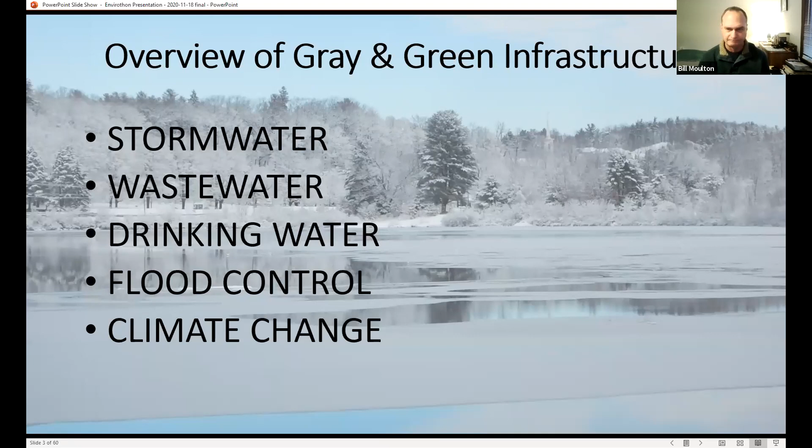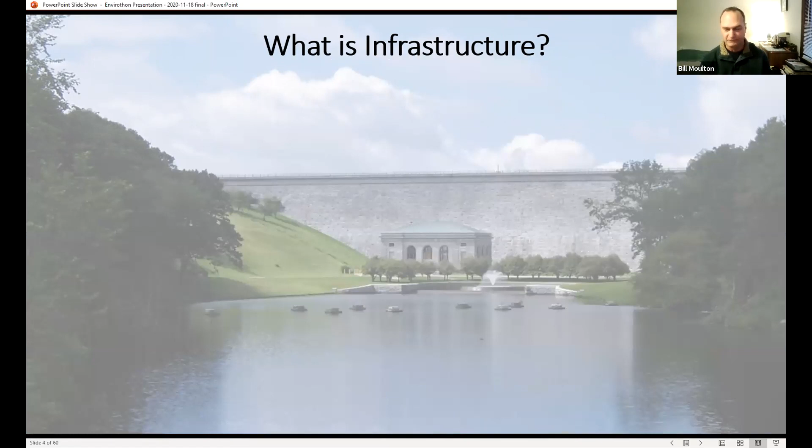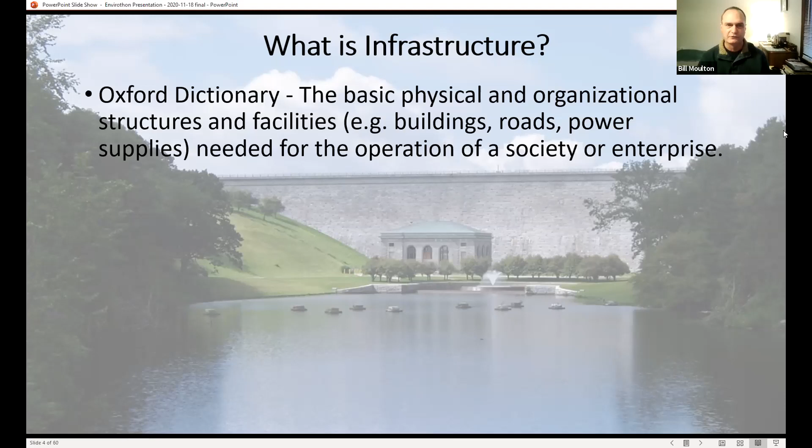So what is infrastructure? You see the slide right there, that's Wachusett Dam. That's infrastructure, but we'll give you some definitions. Oxford Dictionary defines infrastructure as the basic physical and organizational structures and facilities, such as buildings, roads, power supplies needed for the operation of a society or enterprise.

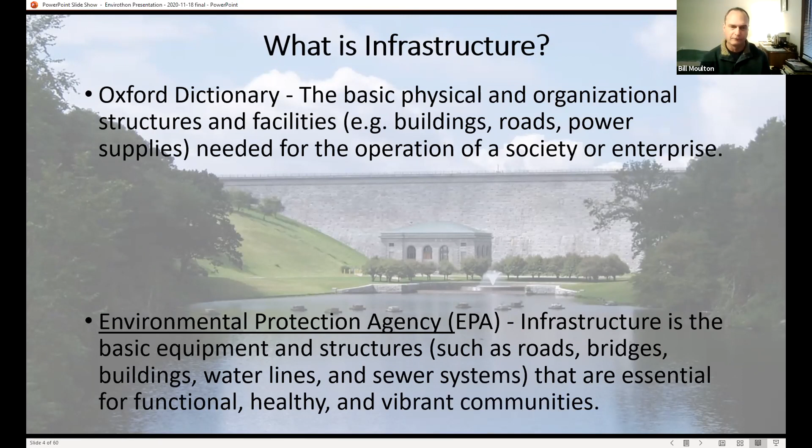The Environmental Protection Agency defines infrastructure as the basic equipment and structures such as roads, bridges, buildings, water lines, and sewer systems that are essential for functional, healthy, and vibrant communities.

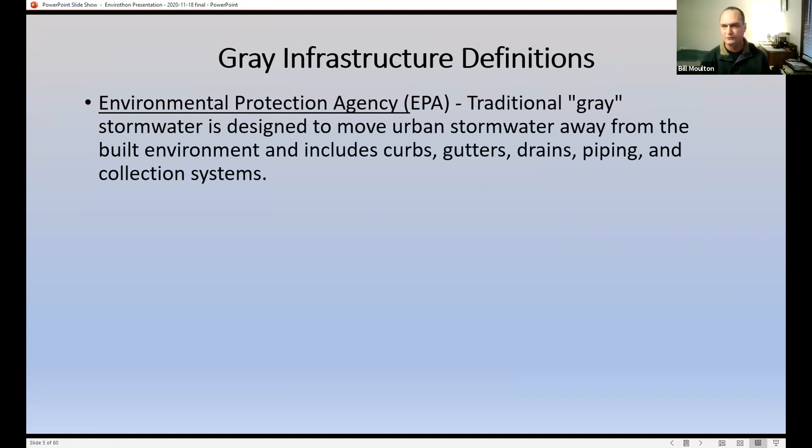So onto the gray infrastructure definition. The Environmental Protection Agency defines it as traditional gray stormwater. It's designed to move urban stormwater away from the built environment, and this includes curbs, gutters, drains, piping, and collection systems.

The National Green Infrastructure Certification Program defines gray infrastructure as constructed structures such as treatment facilities, sewer systems, stormwater systems, or storage basins. The term gray refers to the fact that such structures are often made of concrete.

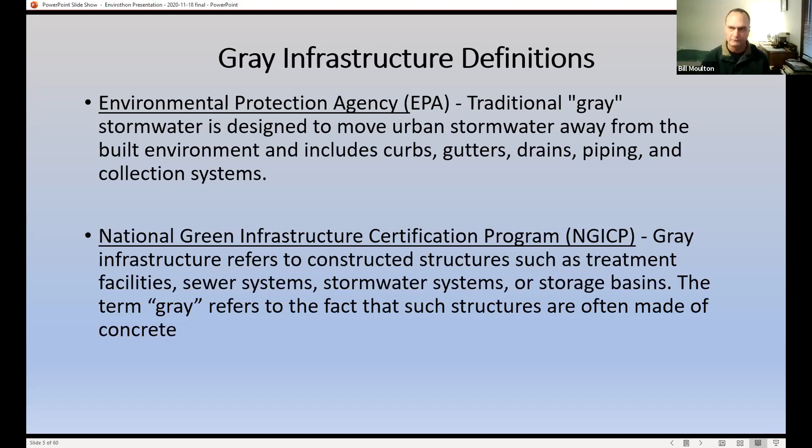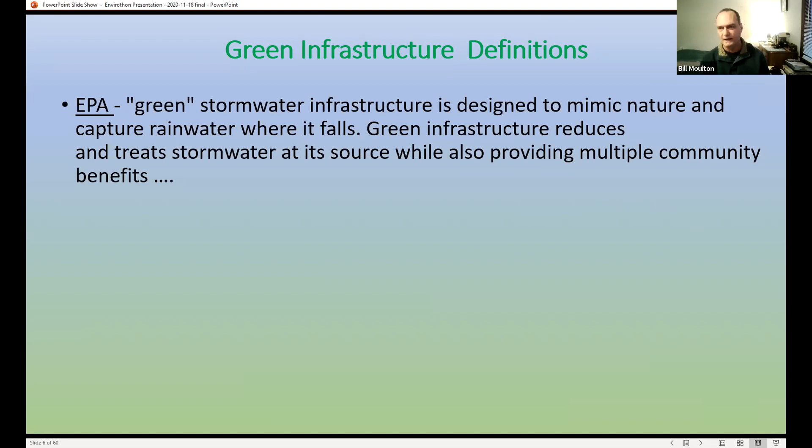Green infrastructure definition: the EPA says green stormwater infrastructure is designed to mimic nature and capture rainwater where it falls. Green infrastructure reduces and treats stormwater at its source while also providing multiple community benefits.

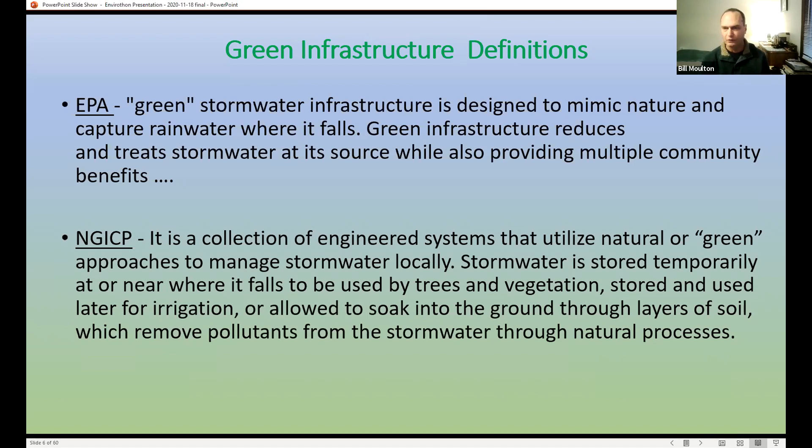The National Green Infrastructure Certification Program defined it as the collection of engineered systems that utilize natural or green approaches to manage stormwater locally. Stormwater is stored temporarily at or near where it falls to be used by trees and vegetation, stored and used later for irrigation, or allowed to soak into the ground through layers of soil, which remove pollutants from the stormwater through natural processes.

I actually found this in our state laws. This is Mass General Law, Part 1, Title 2, Chapter 21, Section 26A, which defined green infrastructure as practices involving the management of water, stormwater, wastewater to achieve water quality mandates set forth in the Federal Clean Water Act.

Practices designed using natural or engineered techniques to capture, remove, or prevent nutrient, nitrogen, and phosphorus loading to any part of a water system, including groundwater deposits, discharges to surface waters from septic systems, wastewater treatment facilities, and stormwater runoff.

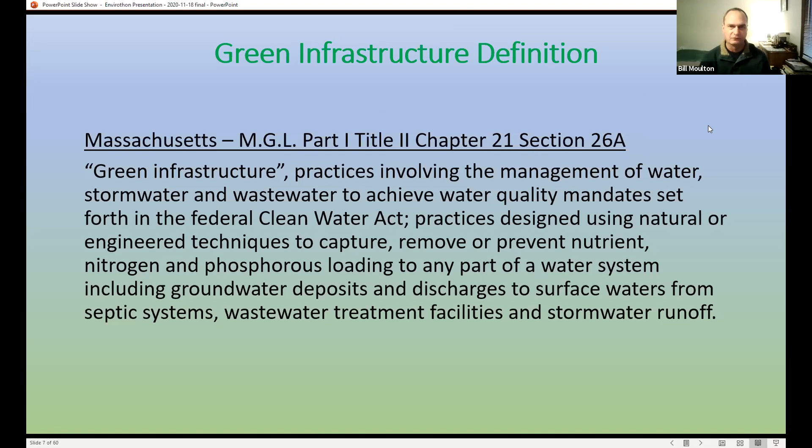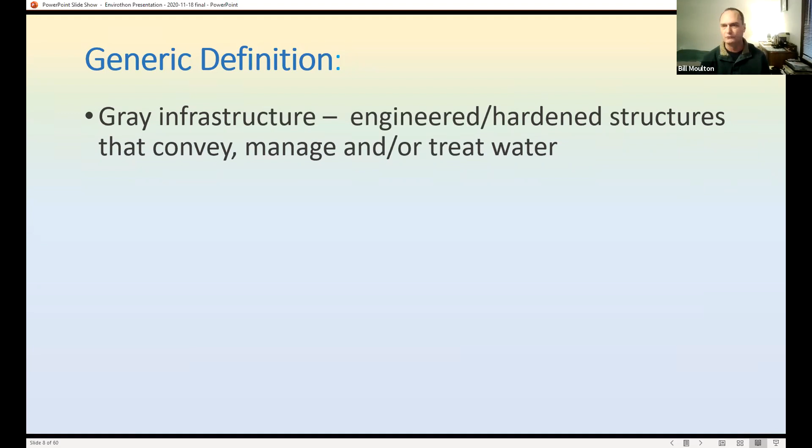So that's our definitions for gray and green. But since a lot of that had to focus on stormwater, I thought I'd develop a more generic definition for our purpose. So gray infrastructure, simply put, is engineered, hardened structures that convey, manage, or treat water. Green infrastructure is more natural and less hardened engineered structures or systems that conserve and keep water locally to be managed and treated.

Now, caveat is these definitions or terms can be relative to the subject, purpose, location, environment, and or scope.

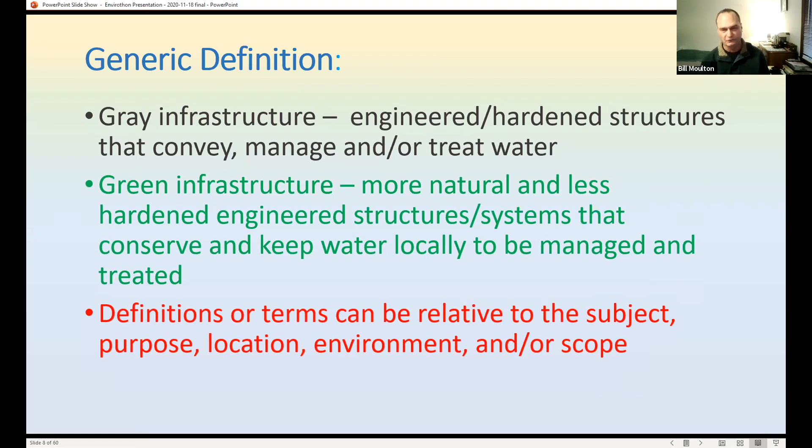So which infrastructure do you think would be the best? Gray, that's probably your traditional infrastructure system. Green, that's your more natural system. We have both, which would be a combination of the two systems.

Now I've put in none, and what I mean by that is utilizing the natural ecosystem to manage the water. And then last would be all, so that would be use the system that best fits the situation. And that goes back to the definition or the caveat I had in the previous slide about the difference relative to the subject, the purpose, location, environment, or scope.

So I think you can't fit everything into one can. You've got to be able to tailor your infrastructure or your system to the needs and the situation, the environment.

So what is stormwater? Rainwater comes down, it goes on roofs, it goes on lawns, driveways, walkways, streets, highways, parking lots, and they all, when that stormwater runs, it has to go somewhere. And so as it travels across all these different surfaces, it picks up pollutants.

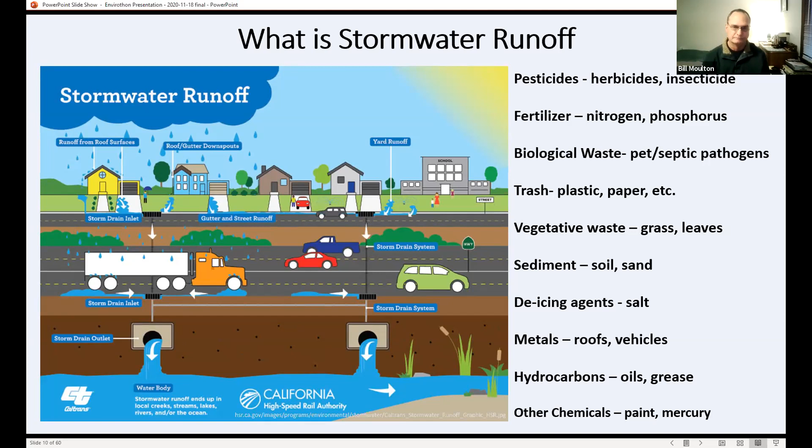So we'll start with stormwater gray infrastructure. Here's just a listing of some gray infrastructure: roads and parking lots. I won't go over them, but they convey water. They are designed to shed water in a particular direction, and that usually goes to a catch basin, and then from the catch basin it goes into pipes. You also have drainage swales and channels that will take water.

You have oil grit separators, proprietary separators, sediment forebays, and detention basins.

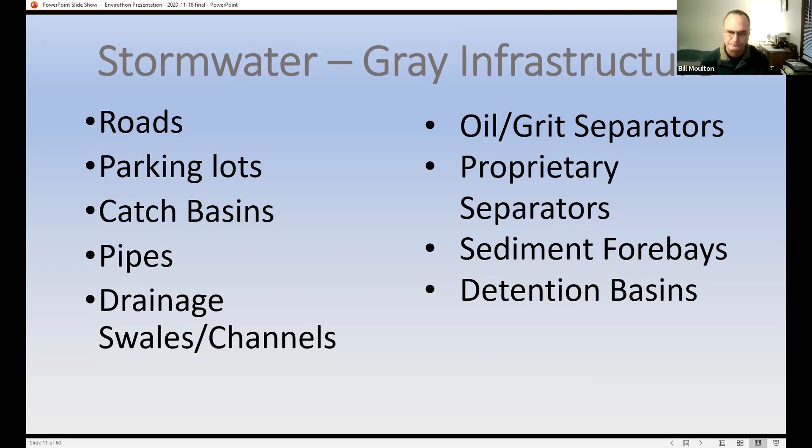The detention basin is not designed to really treat water. You might get a little bit because of the sediment it catches, but it's more designed to attenuate or slow down stormwater flow. So it will reduce peak discharges and reduce our erosion potential. Another, go back to the detention of the catch basin.

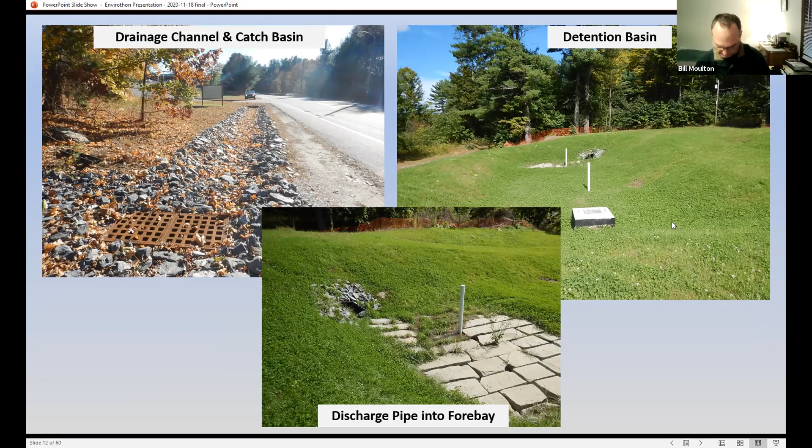This is an oil grit separator. It's designed to capture sediment such as sand and soil, and it's done through baffles. It's also designed to capture any oil that, when you have a storm, will be picked up from the roadway and brought into it. This captures the oil so it's held there and can be pumped out.

And on the right, we have a proprietary separator. That system is designed to remove sediment and oil from the stormwater, but it does it through hydrodynamic forces. It uses velocities to be able to trap the sediment.

This structure is actually a Stormceptor. That's one of the structures we have for our stormwater system. Another one you'll find is what they call a downstream defender.

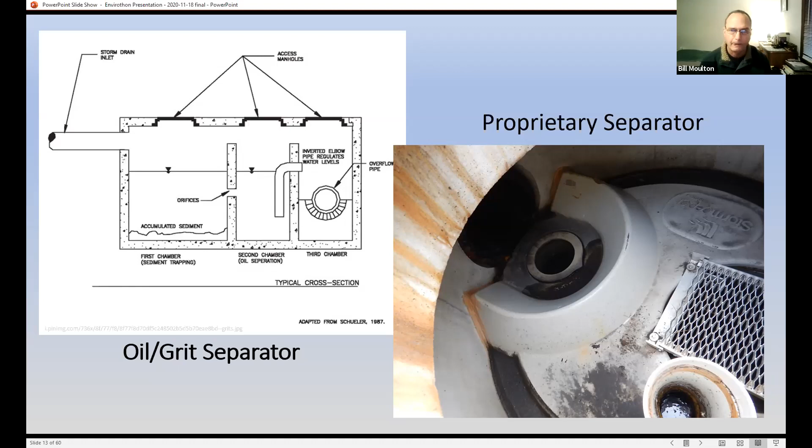So next we'll go over green infrastructure. Starting with a water quality swale, rain gardens, bioretention area, a wet basin like a constructed wetland basin, infiltration basins, porous pavement, permeable pavers, rain barrels, and cisterns.

I want to make a comment about low impact development. You'll see that a lot, especially related to green infrastructure. Green infrastructure utilizes, and low impact development utilizes, green infrastructure. So LID, low impact development, is a system and practices that use or mimic the natural process. That's a definition from the EPA. It's a process where you try to eliminate your stormwater runoff, and that can be done in a variety of ways.

One way would be reducing the widths of your roadways. Many roadways, like out by my house, are probably about 26 feet wide. You could probably reduce that to 22 feet and still have safe travel of traffic. It's just too wide, and actually the wider it is, sometimes people tend to drive a little faster. So that would be another benefit of narrowing.

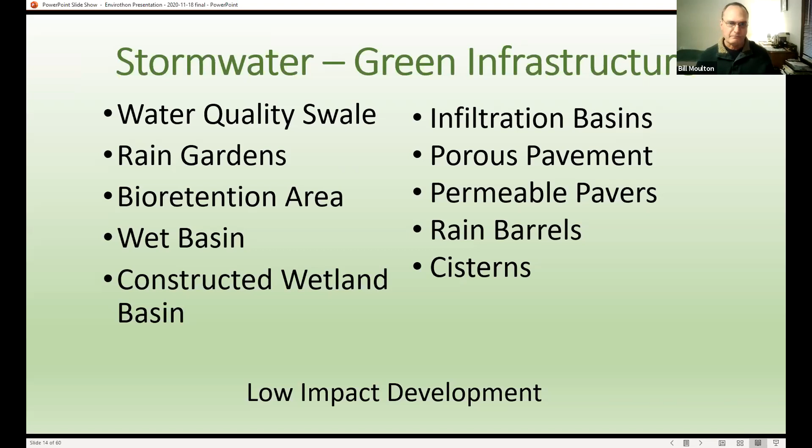So this is a bioretention area, one of our stormwater systems. What happens is it's designed so stormwater will flow into a forebay, and then it will come into the bioretention area. This is designed to capture sediment. It's also designed to treat your runoff, and it infiltrates, so you're recharging the groundwater.

It's designed to capture a particular storm event. Typically this one is designed to capture a 100-year storm event. You may also see that referred to as a 1% event.

And then on the right here we have a rain garden. This rain garden was just put in this year for a small parking area. Generally they're smaller and not designed to take large areas. They're generally designed to capture what they call the first flush from a storm. So if you get a rainstorm, the first amount of stormwater that runs off, it will capture it and treat it. It will infiltrate.

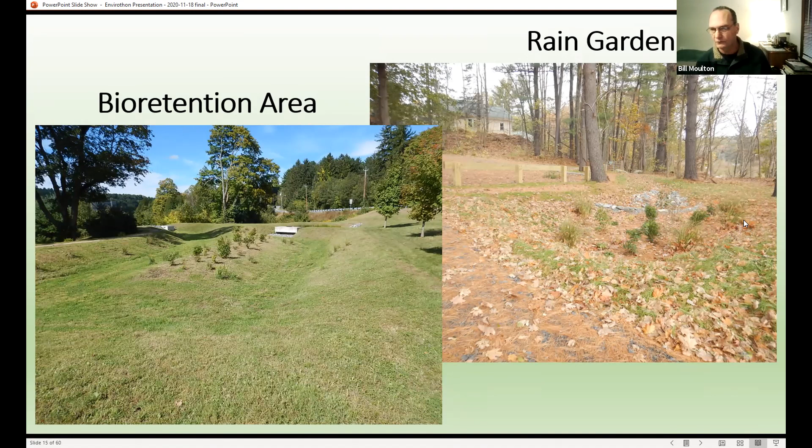This is a wet detention basin, or wet basin. You'll see it maintains water in it all the time. It's designed to capture storm events, particularly a 100-year storm event, or whatever it's designed for, to capture sediment and for pollutant removal. Now let's look at the water quality swale here.

These are usually vegetated, and sometimes they'll have check dams. A check dam is just a bunch of stone placed across the width of the swale to slow down stormwater velocity and prevent scouring, while also capturing sediment. So it's designed to capture sediment and provide some pollutant removal. Usually it's not designed to handle a large storm event, just a smaller one, like maybe a 2 or 10-year storm event.

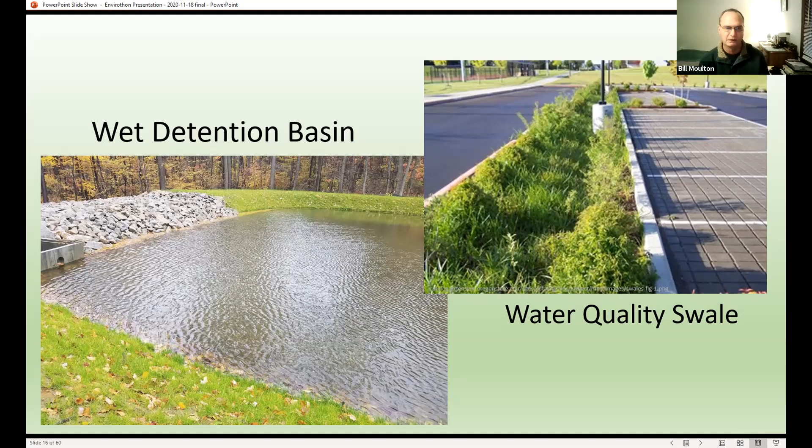This relates to the Wetlands Protection Act—when a system is designed, they look at it within a 2, 10, 25, and 100-year storm. A lot of systems are designed for a 100-year storm, but those tend to be a lot larger. So based on the situation, they may design for a 10-year event in order to capture some sediment and pollutant removal.

So here are the infiltration basins. You have two types: above ground and underground. On the left, stormwater runs off the roadway into a forebay, which captures sediment. You really need that sediment capture, because the water then flows over into the infiltration basin—you don't want too much sediment getting in there, or it will clog and won't infiltrate. This should dry out within 72 hours, which helps recharge your groundwater and provides pollutant removal.

On the right is an underground infiltration basin. Runoff from your parking lot flows into a catch basin and a structure that diverts the water into different bays for infiltration, with gravel usually underneath. It stores the stormwater, and these systems can be designed for large events such as a 100-year storm.

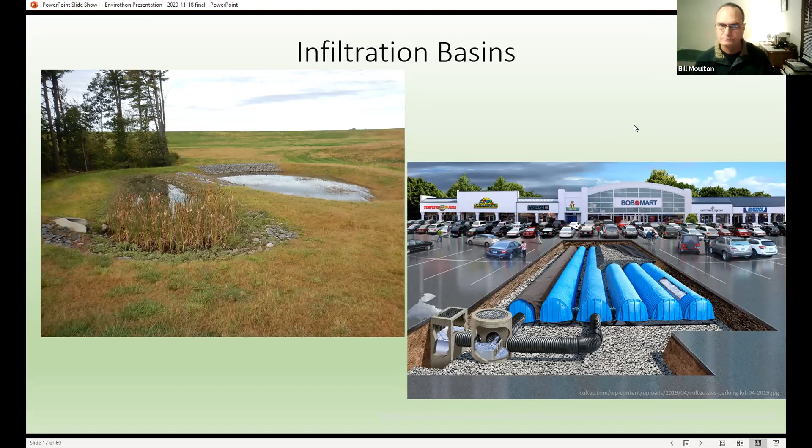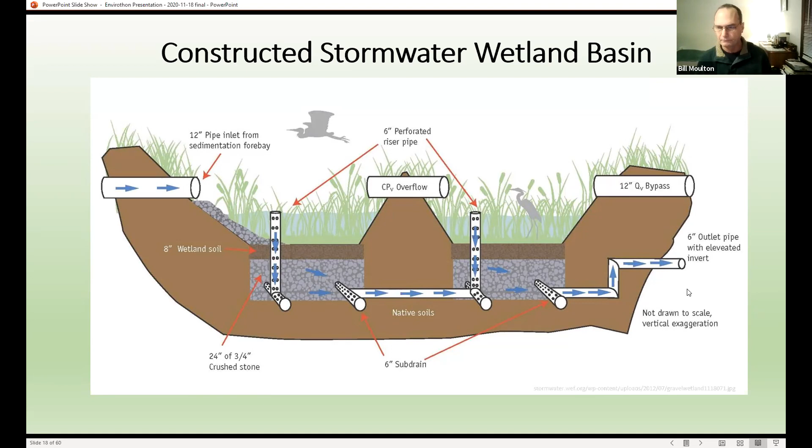The next one is a constructed stormwater wetland basin, also known as a gravel wetland. Water comes in, you have wetland plants that take up nutrients, pollutants, and sediment. It drains through crushed stone, travels through this cell into pipes, into the next cell for additional treatment, and eventually discharges out. We actually have one as part of our stormwater system, taking direct discharge from the roadways into the Wachusett Reservoir.

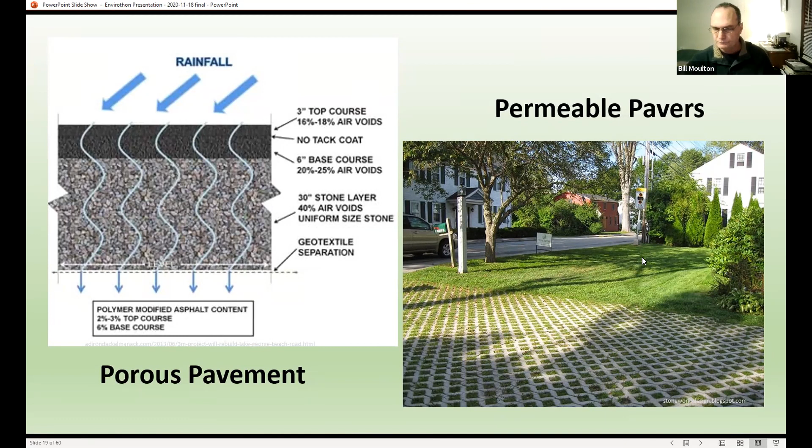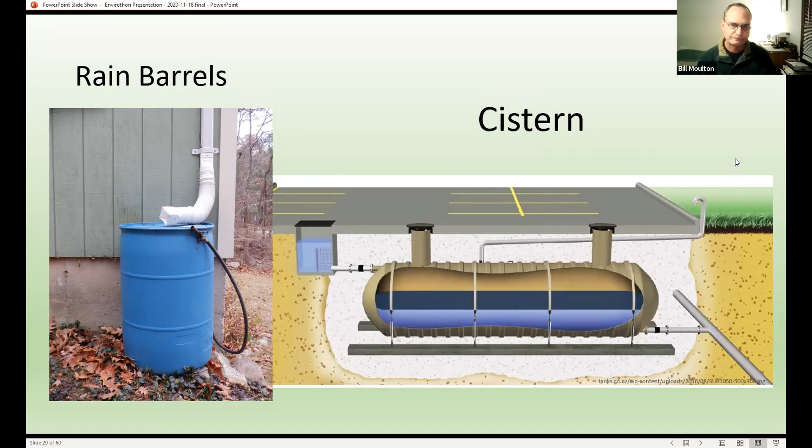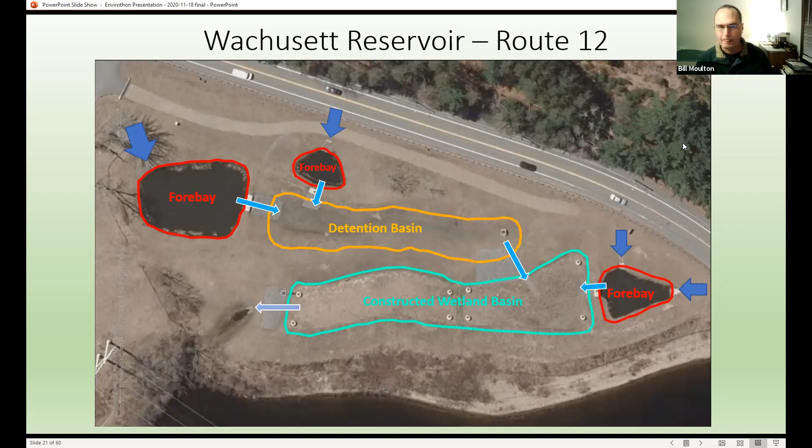So we start with a catch basin. Those catch basins right there—you want to make sure they're not clogged so the water does get into them, because you're trying to capture stormwater. It goes from here to the catch basin. It's a deep sump catch basin.

That will capture some sediment, and then it comes into this sediment forebay. It has an impervious bottom. Most sediment forebays don't have this—they will drain—but because of the desire to prevent issues if there was a spill along this roadway, this would help capture any kind of oil or fuel that was spilled, and wouldn't allow it to seep into the ground.

And then we have this oil control structure, designed to prevent any kind of fuel or oil that gets into a sediment forebay from going into the detention basin or the gravel wetland. This is the detention basin—it's long, designed for a 100-year storm, so it will handle a 100-year storm.

At the far end, you'll see another oil control structure. The water will come from this forebay here, down this way, and then go into your gravel wetland.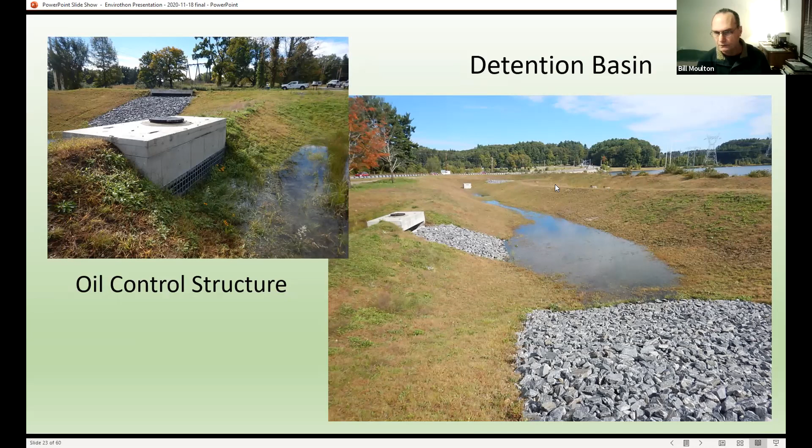So here's the gravel wetland. This is the discharge pipe from the detention basin. This rock area here is an emergency spillway—so if the water gets too high, it will spill over. The reason you use large stone is to prevent any kind of erosion or cutting of the bank. This would prevent that.

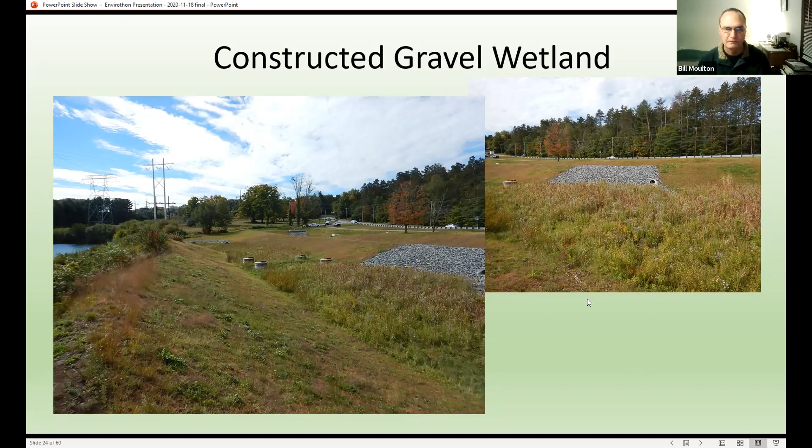The water then comes into this gravel wetland and eventually soaks down. The plants take up the nutrients. So here in the lower right, you have these wetland plants—you see a lot of cattails. I don't want any kind of hardwood trees growing in there; you want to keep it more herbaceous vegetation. And then you have your leaching chambers here.

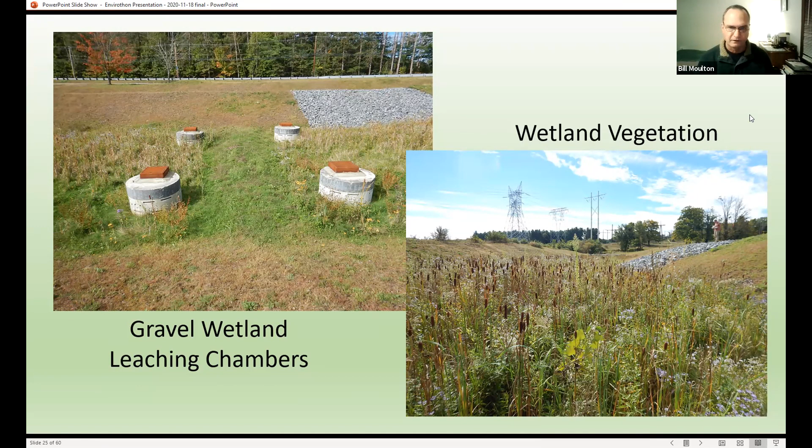If you went back to that diagram about the constructed wetland, this is very similar. The water comes from the right, goes into drainage pipes that collect and move it through this berm, releasing into the gravel and this cell, eventually making its way to the discharge pipe and then into the reservoir. That's a pretty big area used to capture stormwater to protect the reservoir.

So now there's another issue to take up for gray-green, which is wastewater. We have composting toilets and household septic systems - I'd classify that as more of a gray system. Alternate or enhanced septic systems would be more of a green system. Constructed wetland septic system - green. Community cluster septic system - classified as gray. Constructed wetland wastewater treatment plant - that would be considered green infrastructure. Then you have municipal and regional wastewater treatment systems, and last, reclaimed and reused wastewater.

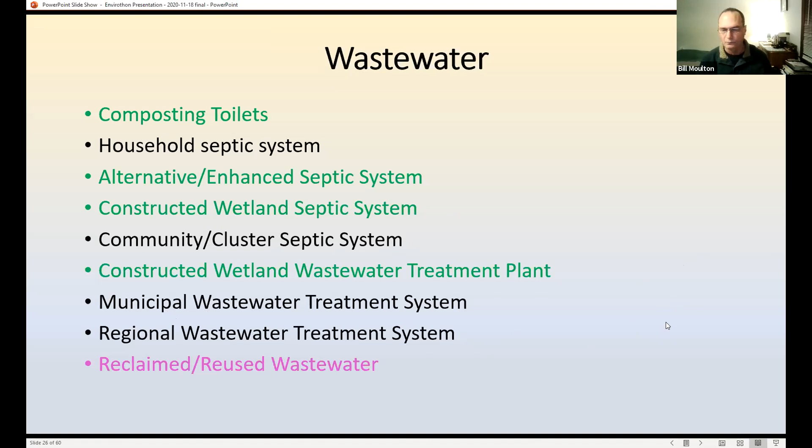So composting toilets - you'll see these if you go to Mass Audubon, they have some in some of their sanctuaries or facilities. Usually your waste goes in here, and you've got to put in organic matter such as leaves that'll decompose. You have a vent to take the smells away, and eventually you have to clean this out. But it works, and the good thing about it is it doesn't use any water.

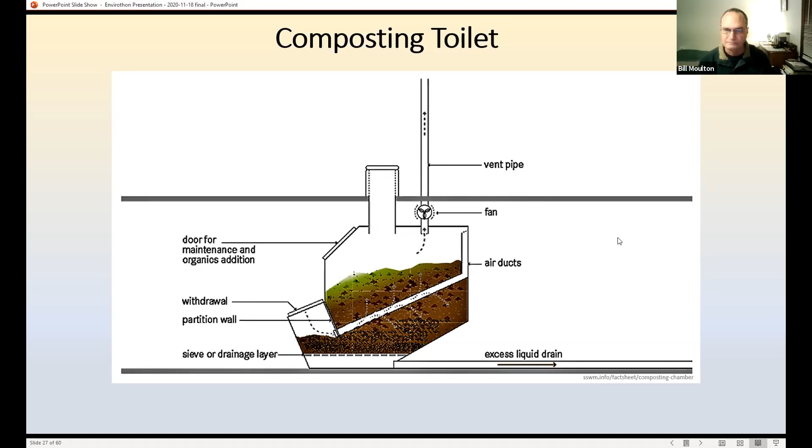This is your conventional septic system, the household septic system. Your waste comes from the house, goes into a septic tank, where solids settle out, and the fluid goes to a distribution box and then to what they call a drain field - what we up here usually call a leaching field. That's usually sand and gravel with perforated pipe that allows the liquid to soak into the ground, where bacteria will eat away at the pathogens and anything in that liquid, so the water is cleaned as it goes down into the soil.

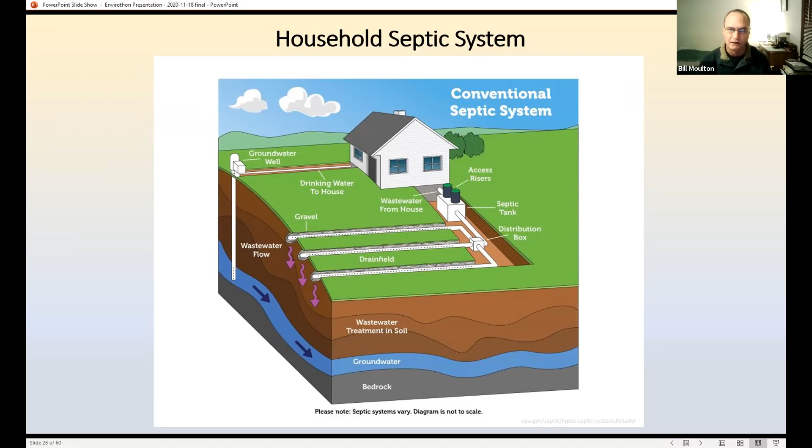It does recharge the groundwater. There are issues - if you see the groundwater well there, depending on regulations, the well has to be a certain distance away from your leaching field. Also, there's a certain amount of space required for a leaching field, so that can be a challenge with putting the septic system in. There are issues with septic systems failing too, since they have a limited life. There's also issues with soil - if you don't have adequate soils, that can be an issue with using a household septic system.

There's alternative or enhanced septic systems - this is just one type, there are different ones. They're designed to treat using this one here as an aerobic system, injecting oxygen down into the tank, which allows bacteria to more efficiently eat the sludge or solids and clean the effluent, so then it comes up and goes to your leaching field. So you have those microorganisms, which is what you want, and you'll see this used actually in much larger treatment plants as one of the treatment methods.

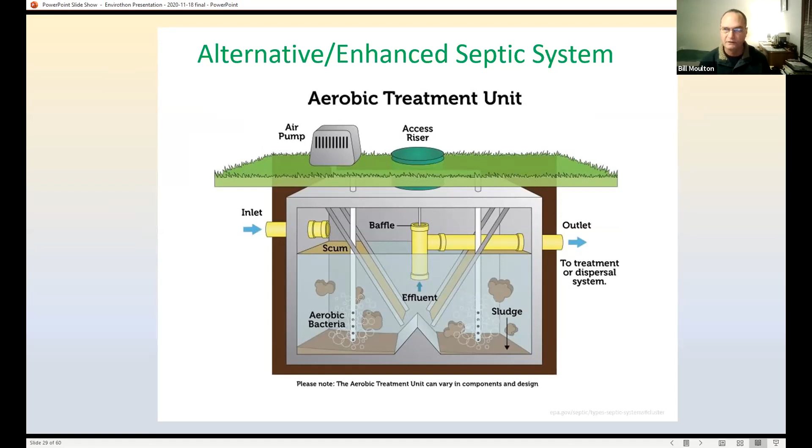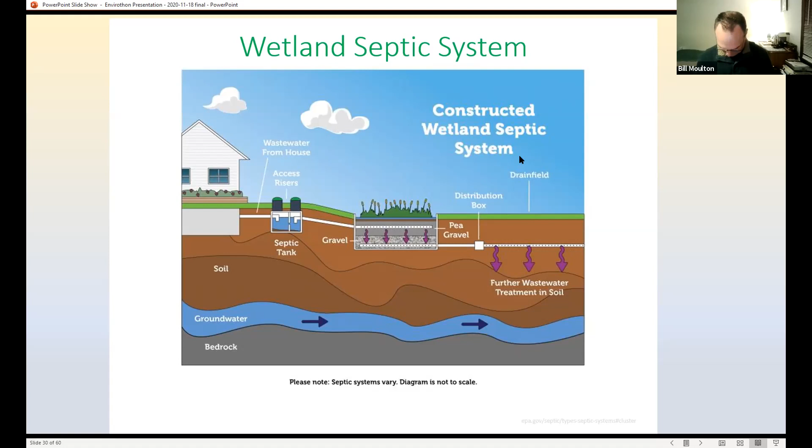This is a community or cluster septic system. This would be where people have their own septic tank, or you could even just have one septic treatment or collection tank, and then it would go to a leaching field. That's one way of using limited space, especially if you're using a cluster development where houses are on smaller lots - you could preserve more open space by using a cluster type septic system.

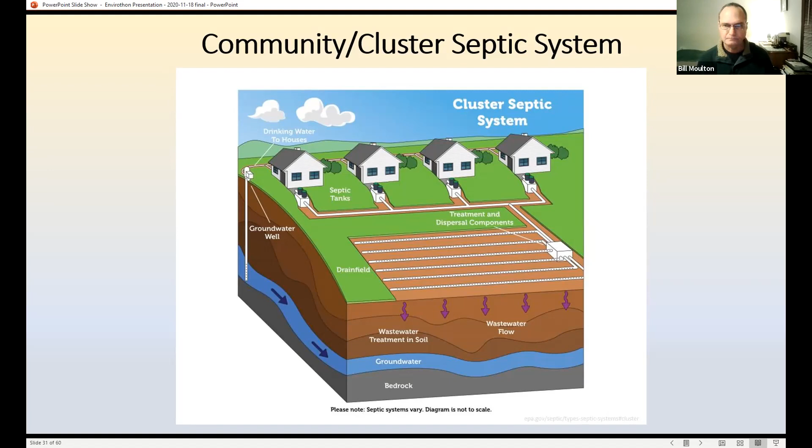So this is something I found doing a search. It's a constructed wetland wastewater treatment facility down in North Carolina. It's designed to treat up to 500,000 gallons per day. Typically, it treats about 250,000 gallons per day.

The treatment process: wastewater comes in, they aerate it to get bacteria in there eating away at the wastewater. It keeps moving along, getting additional aeration through the serpentine system until it's distributed into wetland cells. These wetland cells provide filtration, taking up a lot of the pathogens and nutrients you're trying to get rid of in the wastewater stream. Then they disinfect it with chlorine, and dechlorinate it before discharging into a waterway. You do not want to discharge chlorinated water into a waterway because it will have a negative impact on the aquatic life.

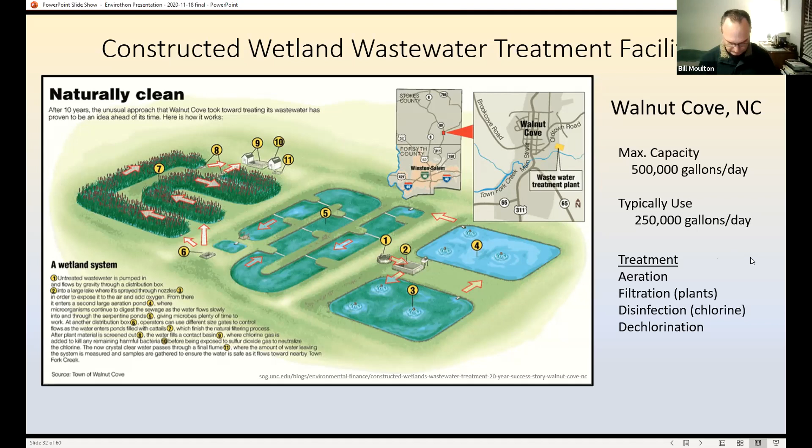This is a small municipal or regional wastewater treatment facility in Westborough. It treats wastewater for Shrewsbury, Westborough, and a little bit of Hopkinton, about 5 to 6 million gallons a day. The treatment process includes settling in the primary system, then aeration. They have phosphorus removal, disinfection, and dechlorination, because this will be discharged into the Assabet River. You can see they've got solar panels that help power the plant, so there is a green component here.

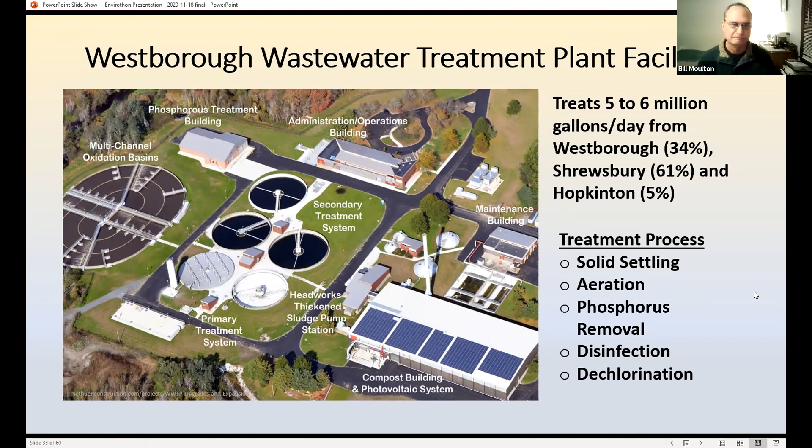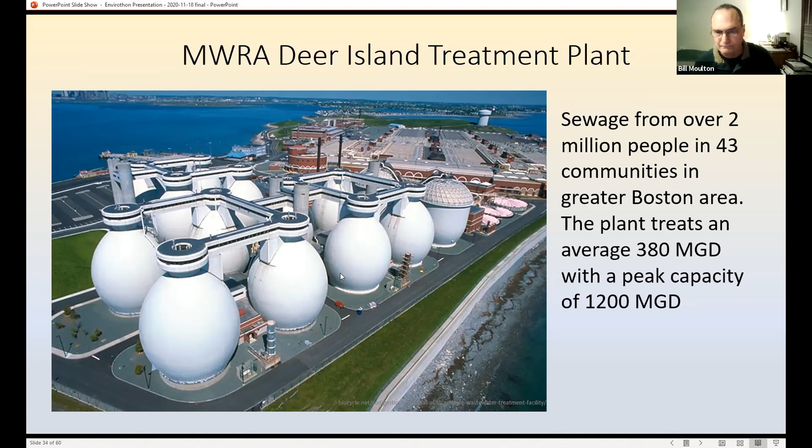Now this is the MWRA Deer Island treatment plant. This is the big one. It handles sewage from over 2 million people in 43 communities throughout the greater Boston area. The plant treats an average of 380 million gallons a day with a peak capacity of 1,200 million gallons per day. Those eggs there are actually digesters that help break down the sludge more, and in the process they create methane, which is actually used to help power the plant.

Now, recycled, reclaimed wastewater. When I first started my master's program in environmental engineering, I did a report on reclaimed wastewater and found a place, about over 20 years ago, out in Irvine, California. They take wastewater and treat it using an advanced waste treatment process that provides an additional level of treatment. They store the water and use it for various purposes: one is irrigation, another is toilet flushing. They have buildings, and because it's a city, they have a law that any new building built had to have a dual system, so it had to have potable water, but also had to have secondary use or reclaimed water.

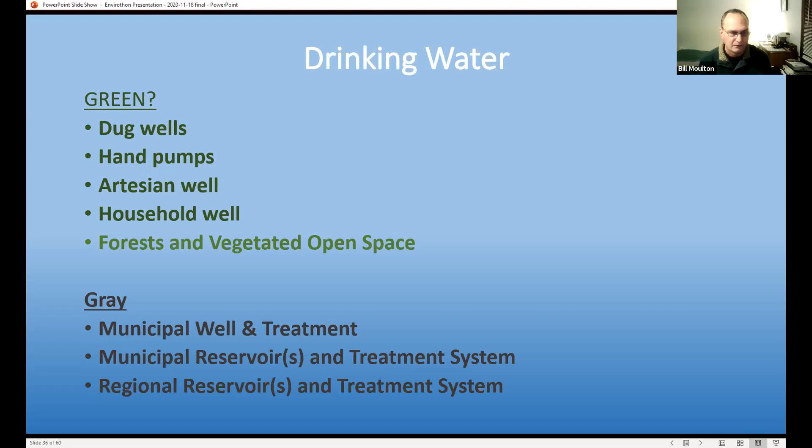So, talk about drinking water. For green infrastructure—I don't know if you want to call these green infrastructure—but a dug well, hand pumps, artesian wells, household wells, and I've thrown in there forest and vegetated open space, and we'll talk about that later. Gray infrastructure for drinking water would be a municipal well and treatment plant, municipal reservoirs and treatment system, or regional reservoirs and treatment systems.

So you have a dug well and you have a hand pump. It's like, well, how can they be green? Well, I'm going to put it to you that I think they would tend to conserve water, because you're not going to use a lot of water if you have to haul a bucket of water up to the house all the time. So you're going to conserve your water. Same thing with the hand pump—it takes a lot of effort to do that, haul it. Even if it is inside the building, it's just not like turning on a tap. So I'm going to say that the more effort you have to put in, the less likely you're going to use a lot of water.

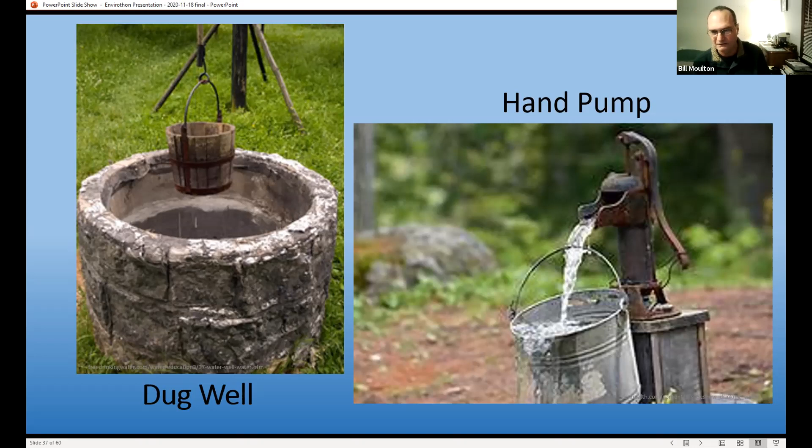An artesian well is where water flows up from a confined aquifer, sandwiched between two confining layers that create pressure. If you put a pipe into it and you're below the pressure level of that confined aquifer, you'd produce a flowing artesian well, which uses a lot less energy than drawing water up from a regular water table, like with a household well. You need a pump to bring that water up into your house, so you need to use energy.

This is a typical household well. You have it drilled down into your water table, your aquifer, and put a pump down there. When you need water, it gets pumped up into typically a pressure tank, which fills up and creates a reservoir. That pressure tank then provides the pressure you need to send water to your faucets.

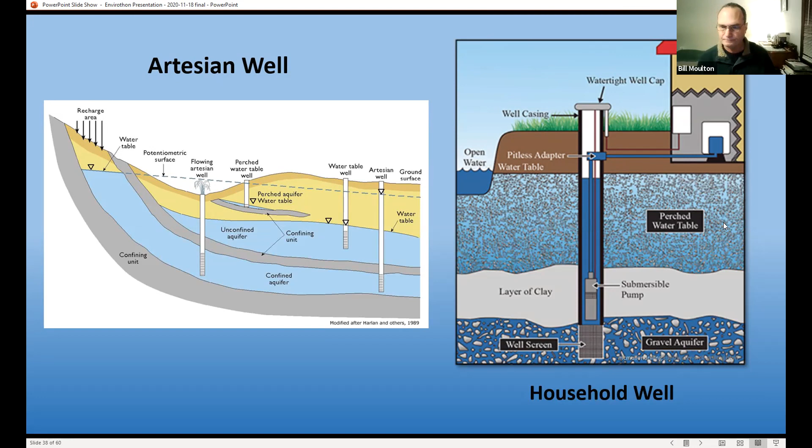Here we have a small municipal well and treatment system, the Boylston Water District. You have your well, and then your treatment, a very small system. They have 5 gravel pack wells located in 3 different places, serving about 70% of the town. Average daily demand is about 47,000 gallons per day, not a lot. Their treatment is really just pH adjustment and disinfection, so it's a very simple system that doesn't use a lot of energy compared to a system with a lot more treatment.

Looking at a report, I think it was back in 2016, they had calculated that unaccounted water was about 6.7%. That's what they consider to be water that is lost within the system, either through leaks.

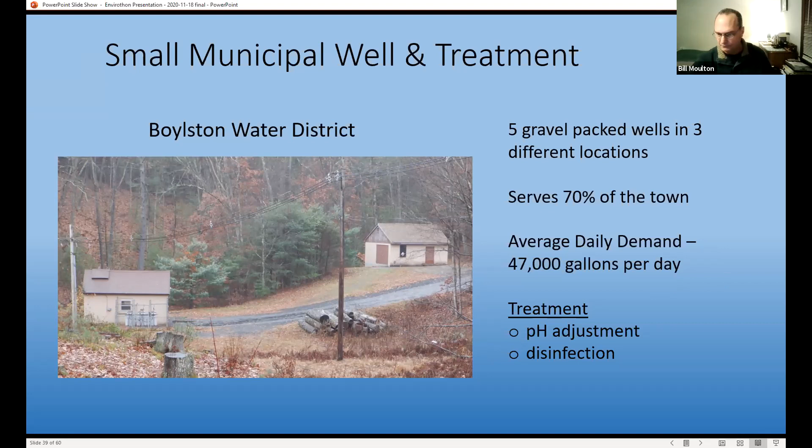Next we have a municipal well and water treatment plant, a little bigger. This is actually for my town, Ashland, and it also provides some water to Hopkinton. It has 5 gravel packed wells all in one location, so it's a sole source, which can be an issue. It serves about 87% of the town, with daily demand about 1.325 million gallons a day.

Treatment includes aeration, flocculation, which is a method of injecting chemicals that help cause sediment to coagulate, and then they run that through a filtration system of sand and granular activated carbon. Then they disinfect it with chloramines, and then adjust the pH.

This is right next to Hopkinton Reservoir. One issue is that even though they're gravel packed wells, they are hydraulically connected to the reservoir, and it does have an impact on reservoir levels. Once the reservoir gets to a certain level, the town has been put on even greater water restrictions, so that's always an issue.

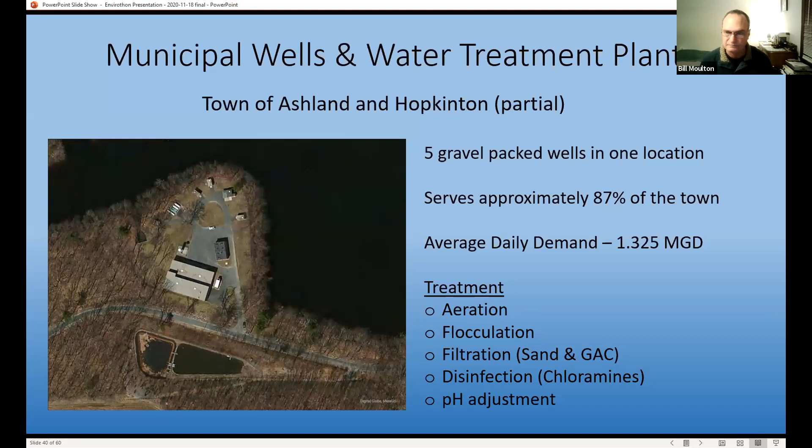This is the system we're involved in at Wachusett, a regional, almost statewide, water supply, treatment, and storage system. This provides water to over 3 million people and 51 communities, most of those in the greater Boston area. There are some in a few towns and communities in Western Mass, like Chicopee and South Hadley Fire District. In the central part of the state they do provide water for some communities, and also in the Metro West area.

Some of the service is full-time, some is partial, or some may be just as a backup to their own regular system. Right now, I can tell you that Ashland, because of the drought and the drain on the reservoir, did an emergency hookup to Southborough, and Southborough uses MWRA water. So I am now drinking Wachusett water.

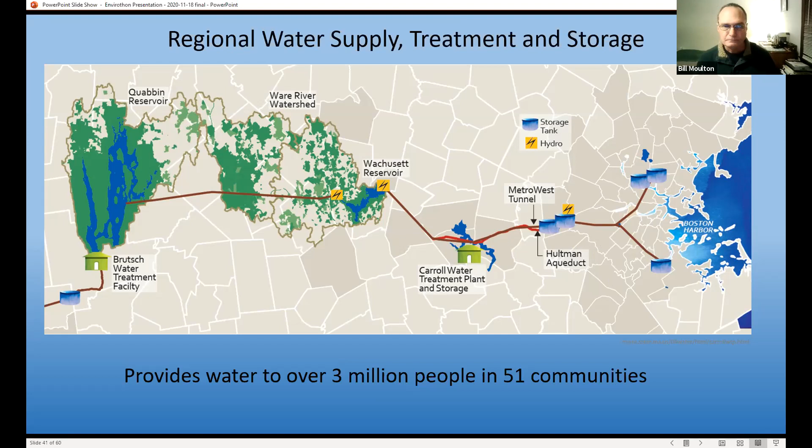So this is Quabbin Watershed. Everybody thinks all the water comes from Quabbin, and quite a bit of it does. Its capacity is about 412 billion gallons. The surface area of the reservoir is over 24,000 acres. The total watershed area, in the blue line, is just under 120,000 acres. The land part is over 95,000 acres. Within the land watershed, about 93.6% is either forest or wetland.

Of that area, the Division of Water Supply Protection controls 65% of the watershed, and another 20% is controlled by other agencies, state or local, and non-governmental organizations such as land trusts, Mass Audubon, and trustees of reservation, organizations like that.

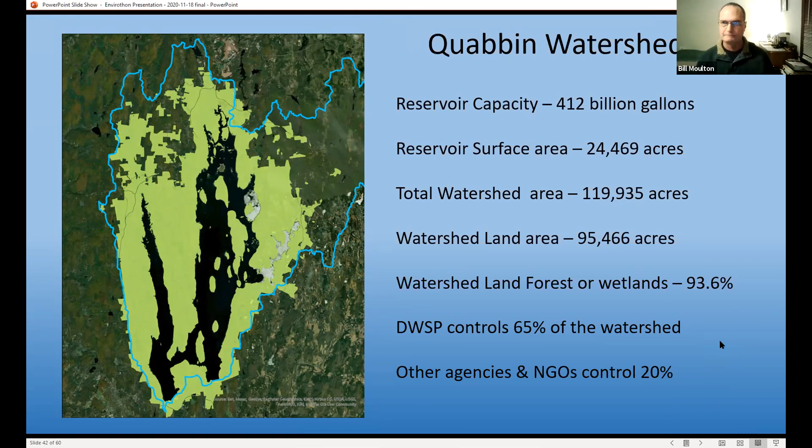Ware River Watershed. The Ware River provides water that can either go to Wachusett or Quabbin. They'll take water out of Ware River, but that can only occur between October 15th and June 15th, and only when the flows in the river are greater than 85 million gallons a day. Typically they divert that water to Quabbin to help replenish it if need be.

The watershed area is almost 62,000 acres, shown by this blue line. The light green you saw is all Division of Water Supply controlled lands, same as Quabbin - all that light green is DCR land. The land that is forest or wetland is about 76%. We control about 41% of the watershed, and other agencies and NGOs control another 17%. So we're talking almost 60%.

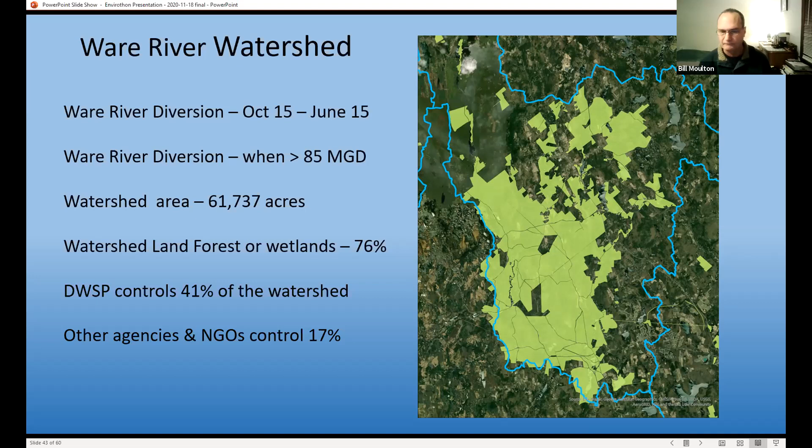In the Wachusett watershed, we have a capacity of 65 billion gallons. The reservoir surface area is over 4,100 acres. Total watershed area is 74,800 acres. The watershed land area is just under 71,000 acres. About 74.7% of the watershed lands is forest or wetlands. The DCR controls about 35% of the watershed, and other agencies and NGOs control about 21%. So about 56% of the watershed is protected open space.

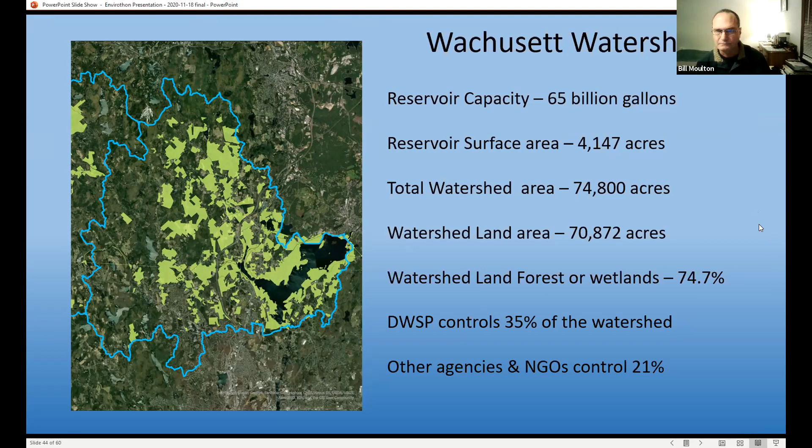So Quabbin flows into Wachusett, and then Wachusett flows to the Carroll Water Treatment Plant in Marlborough. This treatment plant services about 46 communities. Average daily demand is about 200 million gallons a day. Typically in the winter you're down around 175, and during the summer you can get up to 250 or higher. Maximum capacity is about 400 million gallons a day.

They could treat, for treatment and disinfection, they do disinfection by ozone, ultraviolet light, and chlorine. They also add fluoride and do pH adjustment. And you see this area right here? That's a solar array that produces about 500 kilowatts of electricity, which helps power the plant.

Now, going back to what I talked about with forest and open space, the water quality at Quabbin is much better than the water quality at Wachusett. That really has to do with how much of the watershed is protected. Quabbin's watershed is much more protected - we control a lot more - so it really produces much better water quality. The factor that drives that is the amount of forest and vegetated open space. That's why I call it green infrastructure, or a green system - open space is important to good water quality.

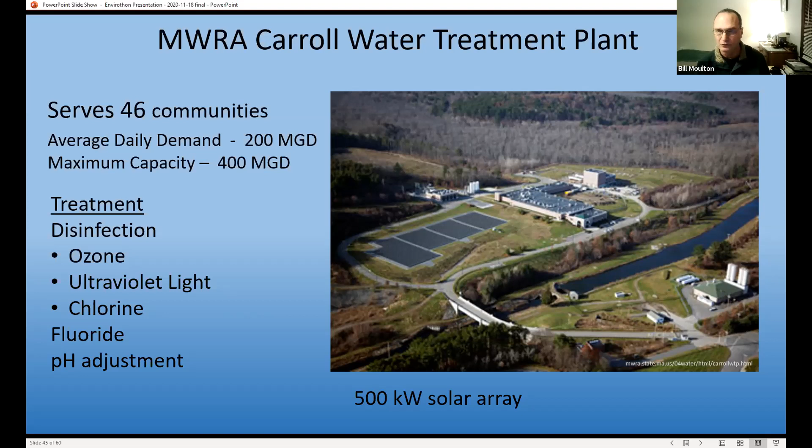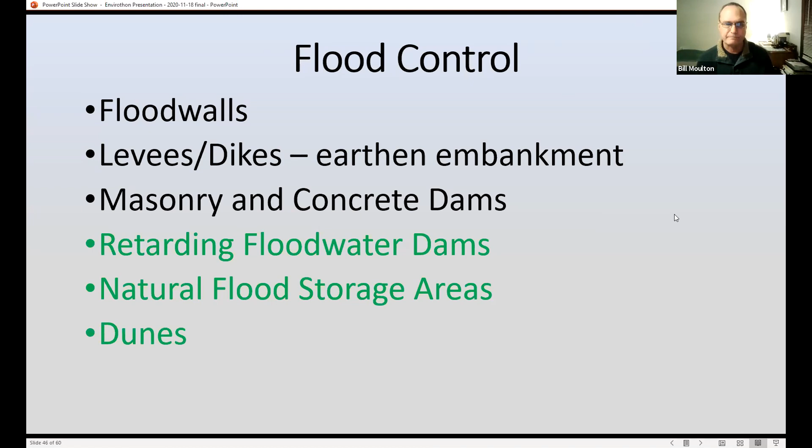So we'll move on to flood control. How do you deal with floods? Well, you can use flood walls, levees or dikes which are earthen embankments, masonry or concrete dams, retarding floodwater dams, natural flood storage areas, and dunes. You might consider the last three more on the green end as green infrastructure. A flood wall is typically a hardened concrete structure, or could be steel, designed just to keep floodwaters out from an area you don't want it.

A levee or dike is usually an earthen embankment. It's designed to hold the water back - same thing, keep the water out of where you don't want it, or keep it confined to where you want to keep it.

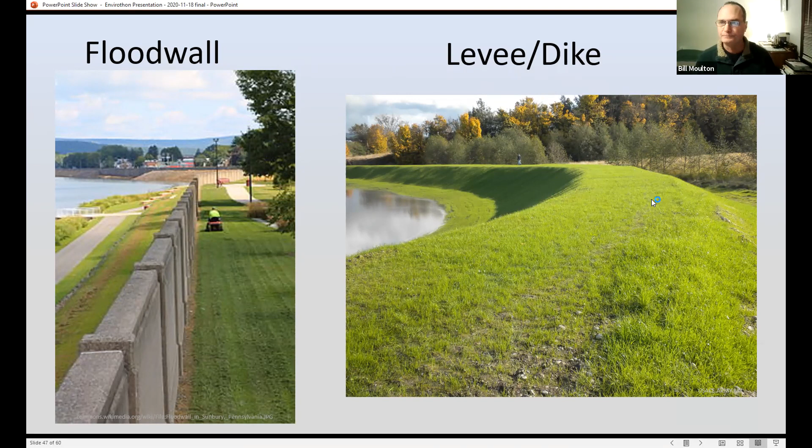They will utilize them for flood control. If they know a big rainstorm is coming, they may release water ahead of time and create some freeboard, meaning you allow for more storage than you normally would. This gives you the ability to take up some extra flood water, which can be released later.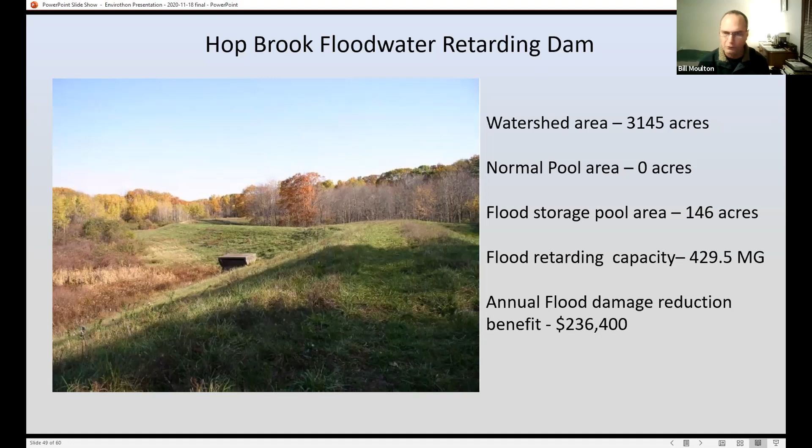So these look like just an area with a high area that would hold back water. This is actually near Northborough Crossing on Route 20. There are several of them throughout the Sudbury-Assabet-Concord Basin.

So this is a natural flood storage area. The Army Corps of Engineers, back in the 70s, realized that in order to help prevent flooding it would be good to use natural flood storage. So in the 70s and mid-80s they acquired 3,229 acres of land and 4,865 acres of easements in order to protect and provide flood storage within the middle and upper Charles River.

This area here is actually 128 right here. This is Cutler Park, and this is the Charles River right here. So this is a big wetland area, and what that wetland does is when you have a lot of floodwaters, wetlands are great - they suck up all the water like a sponge, and then release that water slowly. That helps reduce the amount of flooding you could get downstream. The Army Corps is known for building dikes, levees, and dams, but this is something they realized could benefit and reduce flood damage.

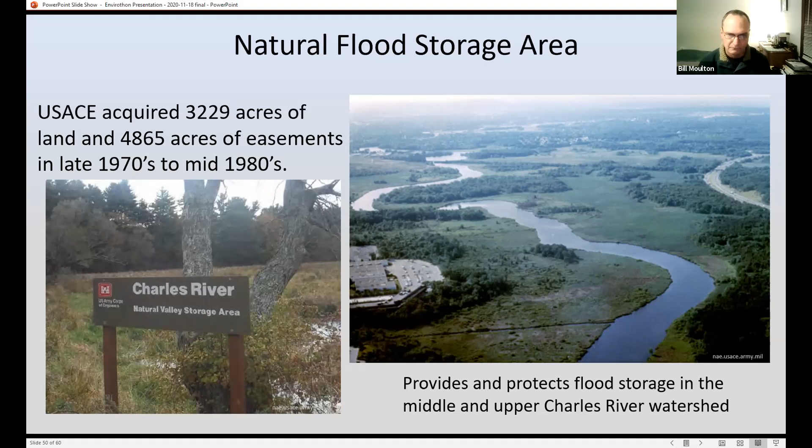And then dunes - for the coastal areas, a lot of places are utilizing dunes. They're creating dunes and planting beach grass in order to help prevent storm surge from causing erosion from storms and causing damage and property loss. So dunes are one way of doing that, and it's considered green infrastructure.

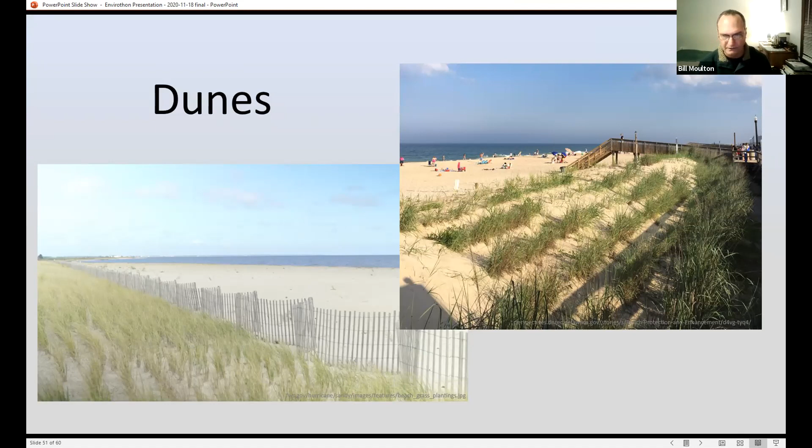We'll move on to climate change - sea level rise, temperature rise. We'll go over changes in precipitation and storm intensity and frequency.

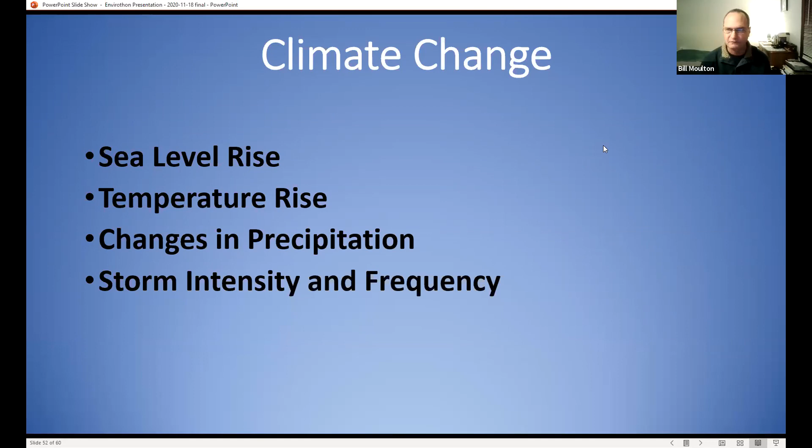The relative mean sea level rise projection from now to 2050 for Boston is from 1.4 to 3.1 feet. This is based on modeling of different emissions scenarios and how much the temperature will rise. By the end of the century, they expect it to rise anywhere between 4 to 10.2 feet.

For Woods Hole, similar numbers: 1.3 to 3.1 feet for mid-century, and then 4 to 10.3 feet by the end of the century. In Nantucket, very similar numbers, 1.5 to 3.1 feet for mid-century and 4.2 to 10.5 feet by the end of the century.

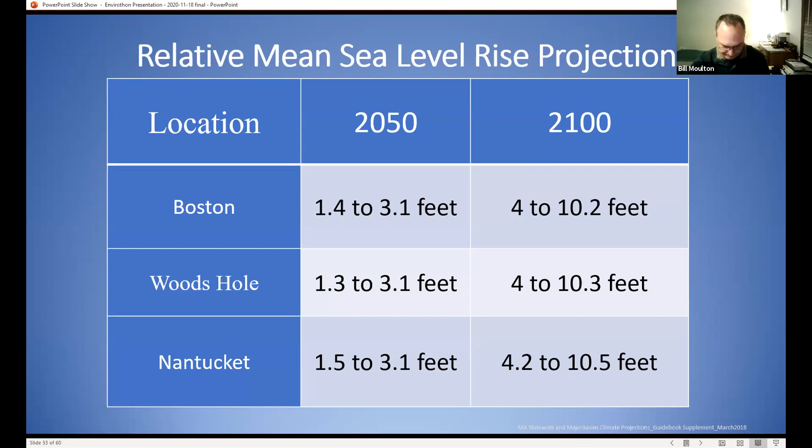So projected temperature changes - in the first column we have the observed baseline from 1971 to 2000. Then we have projected changes in the mid-2050s, which is the range they identified, and then projected changes by the 2090s.

The average net temperature is 47.6 degrees. They expect it to increase by 2.8 to 6.2 degrees, which would be a 6 to 13% increase. By the end of the century, they expect an increase of 3.8 to 10.8 degrees, which would be an 8 to 23% increase.

Maximum temperature is 58 degrees. They expect that to increase 2.6 to 6.1 mid-century, that'd be 4 to 11%, and then increase by 3.4 to 10.7 degrees by the end of the century.

Minimum temperature, 37.1 degrees is the baseline, and they expect that to increase by 3.2 to 6.4 degrees. And then by the end of the century, 4.1 to 10.9 degrees.

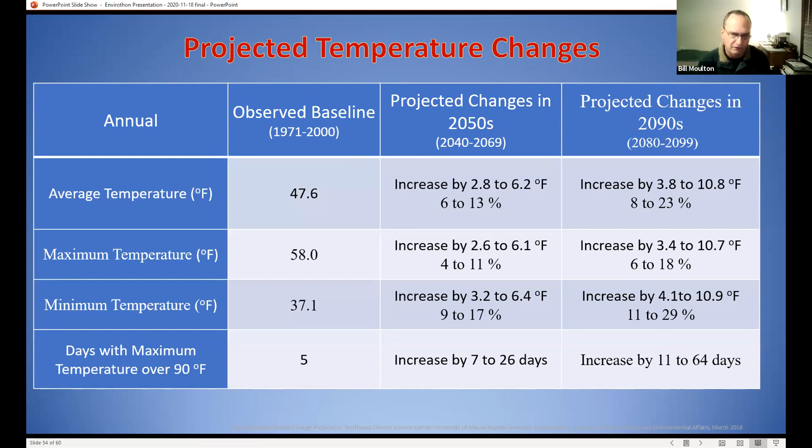So for precipitation, this is the amount of precipitation observed between 1958 and 2016. This shows the amount of precipitation falling in the top 1% of all daily precipitation events, so that's the highest precipitation, like a 100-year storm type of thing.

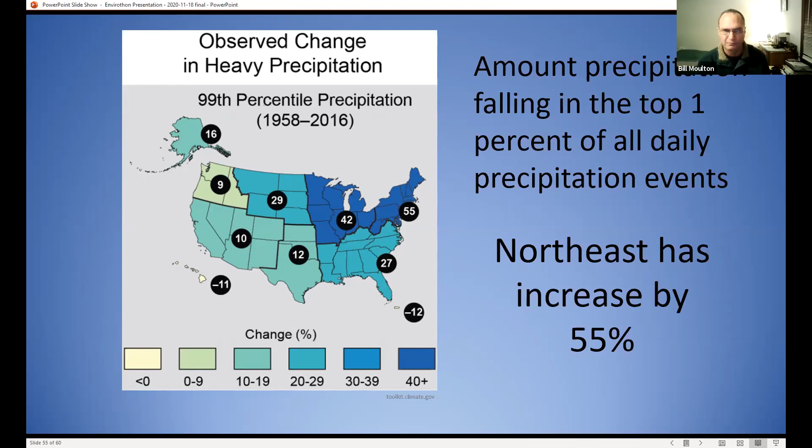The Northeast has shown an increase in the amount by 55% in the amount of precipitation. So that's what's already happening.

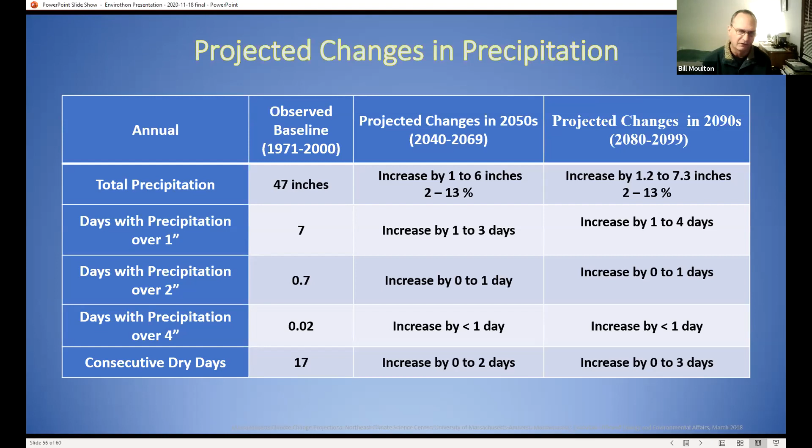So as talked about, when you file with conservation under the Wetlands Protection Act, you have to compensate for storm events in your stormwater systems. Typically we look at 2, 10, 25, and 100 year storms, and there's different ways of calculating that depending on where you are.

The federal government had what they call Technical Paper 40, done back in 1961. They developed charts that would estimate what the rainfall for each particular event over a 24-hour period would be. For the 2 year storm, it had 3.1.

NOAA Atlas 14 is an updated model for what precipitation is doing for those particular storm events. Another one is the Northeast Regional Climate Center, based out of Cornell, and they have modeling estimating these particular events.

So for the 2 year storm, TP40 is 3.1. That's the way it's been, that's what you're supposed to use for calculating your stormwater events. This is just for Worcester, it'll change for your different locale.

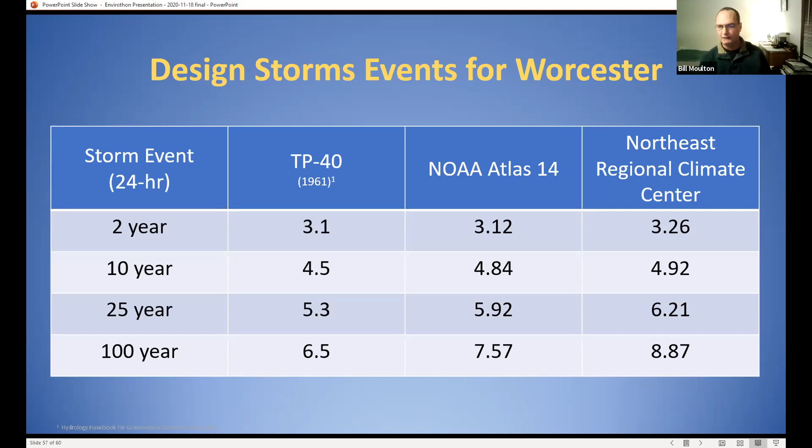And then what is in store for you? Projections show sea levels will continue to rise. I mean, they've already risen. Hot days will become even hotter and more frequent. The overall climate will be warmer, so winters will be warmer, summers will be even hotter. Precipitation events will be more frequent and more intense. You saw those storm events, how you're getting a lot more precipitation in a 24-hour period than had happened in the past.

So the impact will affect all infrastructure, both green and gray. Infrastructure built in the past cannot manage the storm events they were designed for. When you built a detention basin back in the 80s based on TP40, that would say be 6.5 inches to determine your calculation on the size of that basin. And now, if you use a Northeast model, you're getting over 8.8 inches. That basin may not be able to handle the storm event it was intended to handle.

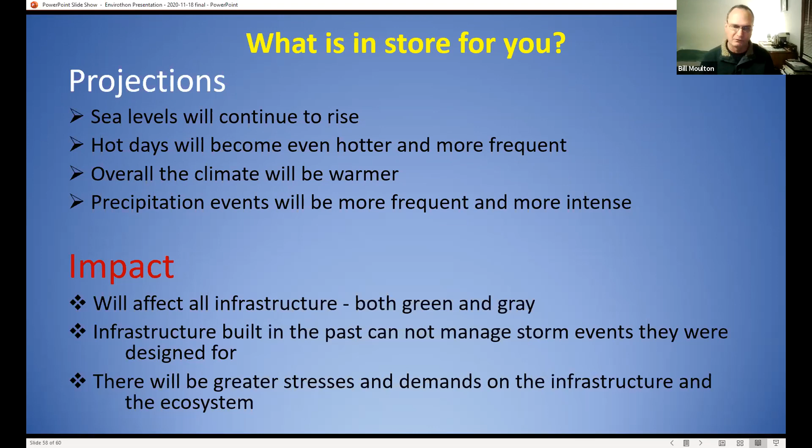So in summary, gray and green infrastructure can be identified for more than just stormwater. We looked at different uses: wastewater, drinking water, flood control. Green infrastructure works and can be an important tool in managing water. I would say if you can use green infrastructure, use it. I think it's much more aesthetically pleasing than a concrete structure or a plain structure that doesn't have any visual value.

The situation dictates the methods required, and usually a combined approach is needed, so you can use gray and green. And all infrastructure needs to be maintained, green just as much as gray. You need to make sure it's operating the way it's supposed to, and that means maintenance. You can't just build it and forget it, which happens a lot, but there are ways of doing that.

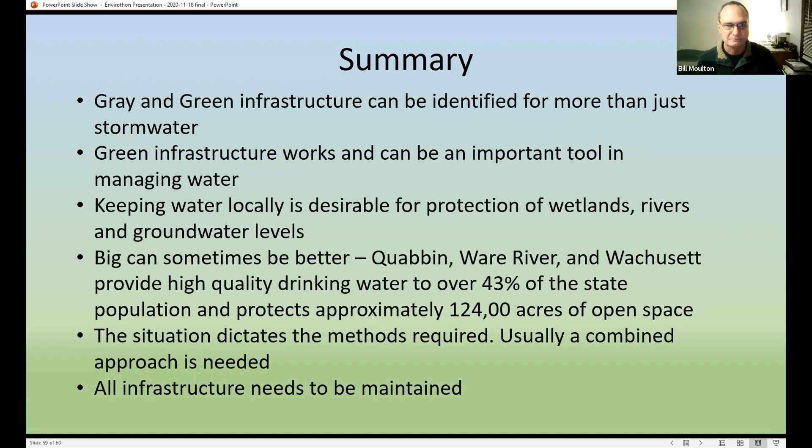Any questions? This is Wachusett at sunset.

It's a beautiful shot. Thank you. Thank you so much, Bill, for all of this. That's a lot. We all leave. No, there's still some people here. So folks, Kelly, do you want to do this? Or do you want me to? I'm glad you're still here too. You can do it if you like. Okay, awesome.

All right, we have a question from Richard. Can sediment from stormwater clog the voids present in porous pavement? Excellent question, and yes. The way you maintain porous pavement is you have to vacuum it. They have machines, so you vacuum your porous pavement. One way is to try to limit how much sand you put on during the winter. You may still get stuff washing into it, but that's how you maintain porous pavement, is to vacuum it.

Can you tell the difference between porous and impermeable pavement as you drive over it or walk over it? Yes, actually, you could go online and see pictures where half is regular pavement and the other is porous, and they dump water. Where it's porous, it just soaks right away. Where if you look at the regular asphalt pavement, it's just shedding, and you can see how wet it is.